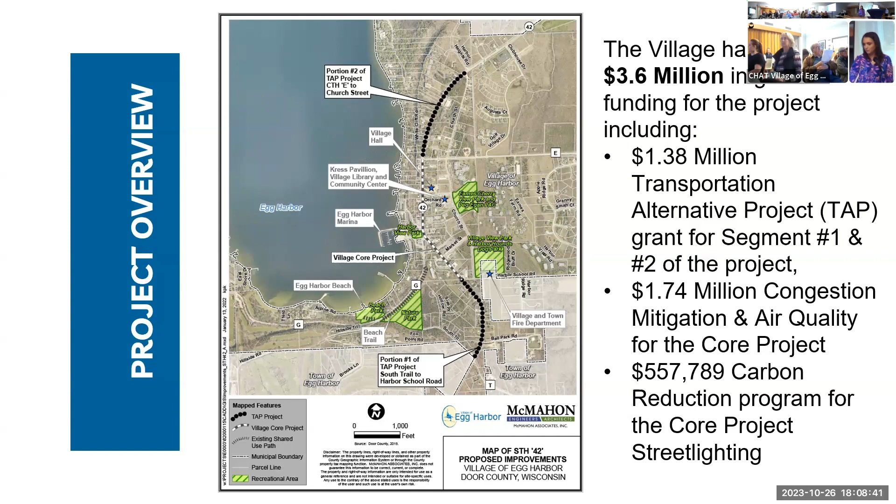A little bit more detail on what each of these project sections entail. First is section 1 of the TAP project section, running from approximately South Trail to Harbor School. This includes urbanizing the highway on the west side to South Trail and east side to Ball Park Road. We'll be constructing a 5-foot concrete sidewalk and a 6-foot green terrace. There'll be on-street bike lanes in this section, street lighting, and some utility replacement and relocation completed by WPS as well. That's not quite underway in this section, but coming up.

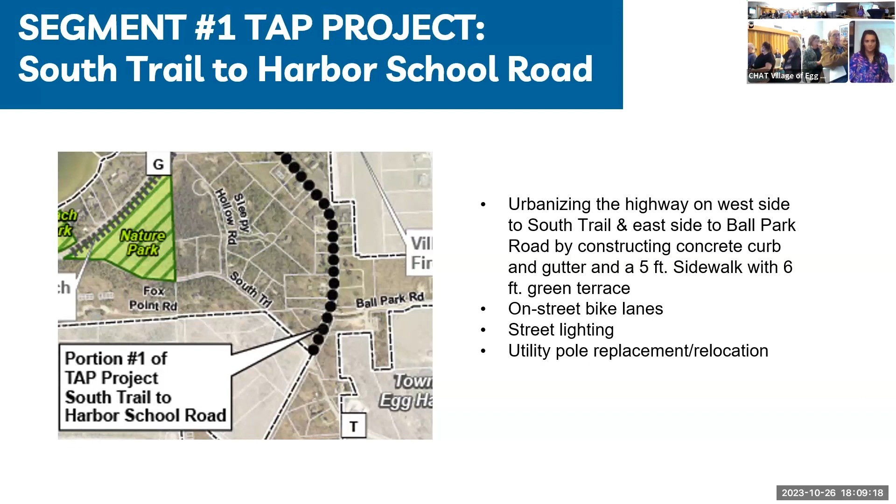Here's a cross section of what that project section will look like at the end of construction. Again, you can see the 5-foot sidewalk and the 6-foot terrace with the bike lanes.

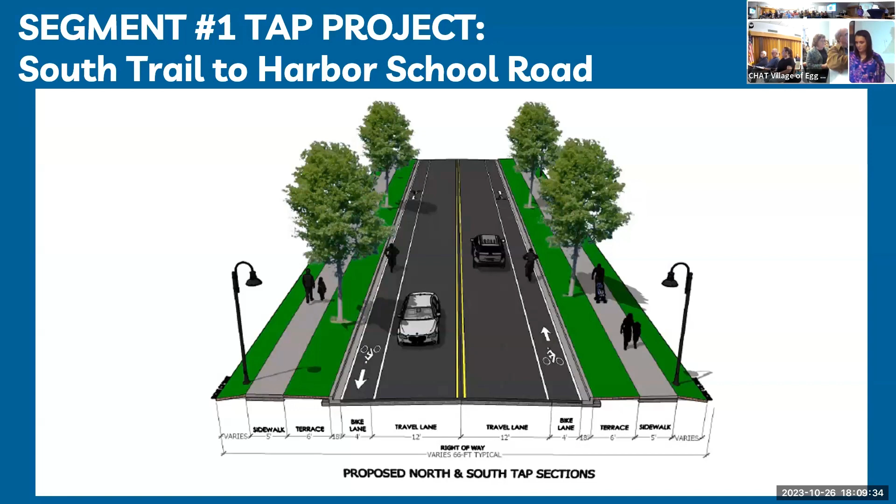Moving north, the next project section is from Harbor School Road to County Highway E. This is what we refer to as the core project section. This includes a 5-foot sidewalk on both sides of the road, a 4.5-foot concrete terrace between the sidewalk and back of curb, with a brick paver accent in the terrace. There's 8-foot parking lanes, bike accommodations throughout this project section. There'll be a dedicated 2-way left turn lane from approximately the County Highway G intersection to approximately the White Cliff Road intersection. This project section includes utility line burial, and also the urbanization of County Highway E on the south side with sidewalk and parking, as well as curb and gutter and bike lanes on both sides of the road. The core project section also includes some modification to our parking lot out at the Bertschinger Center to maximize parking space.

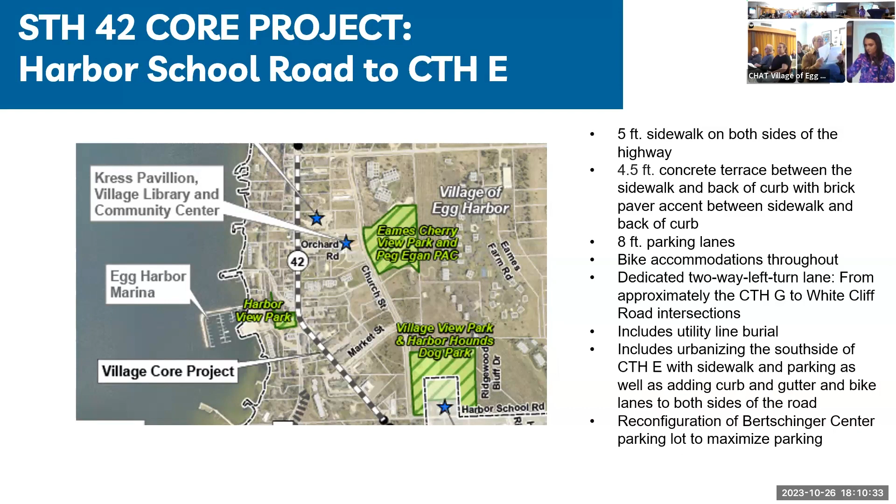This is the cross-section visual of what the core section will look like. Again, you can see the 5-foot sidewalk, 4.5-foot concrete terrace, and the brick paver accents with the parking lanes and travel lanes and bike accommodations.

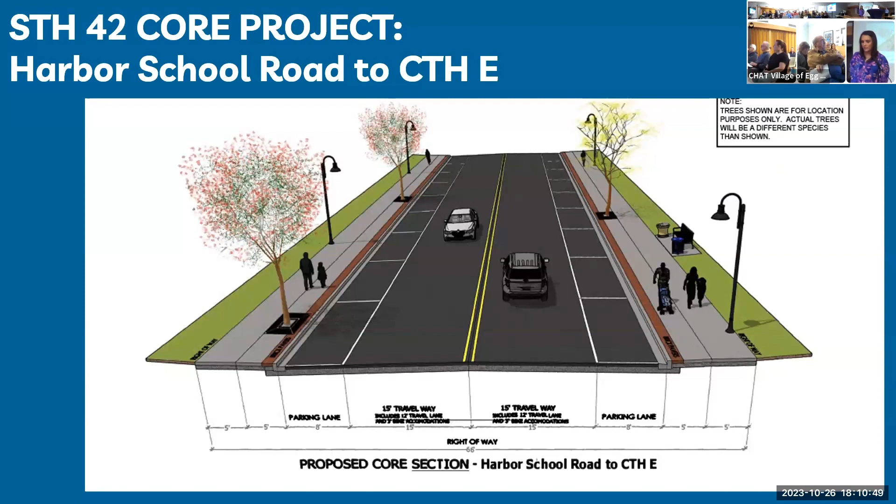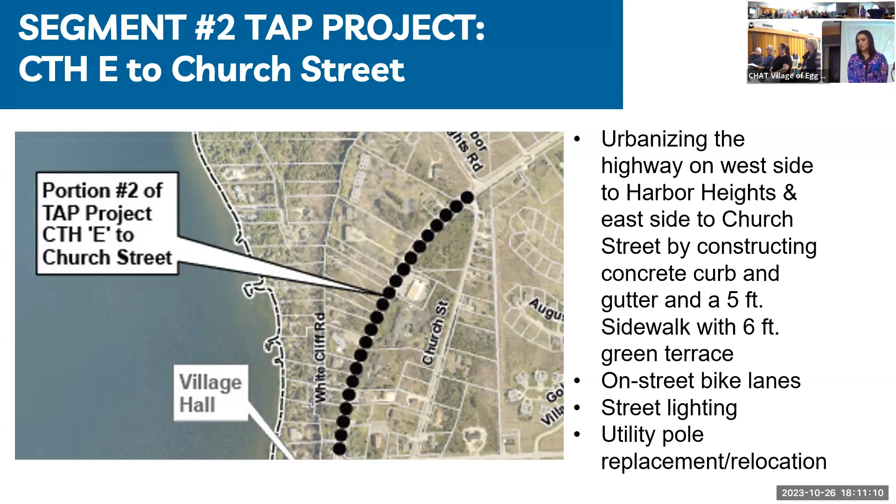Our last project section is the North Tap project section that runs from County Highway E to Church Street. This includes urbanizing the highway on the west side of the road up to Harbor Heights and the east side of the road up to Church Street, by constructing a 5-foot sidewalk and a 6-foot green terrace. It also has bike lanes in this section, street lighting, and again utility replacement or relocation. The same cross section applies for the South Tap section and the North Tap section here.

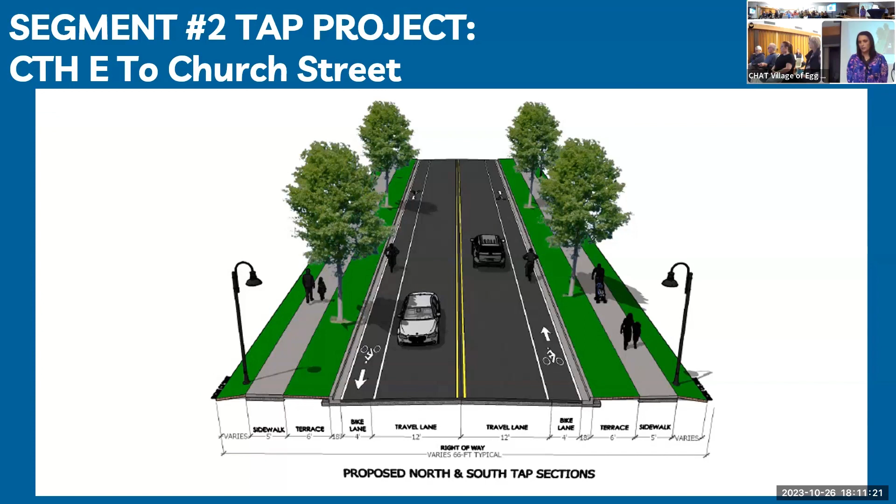Just want to quickly touch on the project purpose and priorities. The overarching goal of this project is to replace and enhance our aging and deteriorating infrastructure. We have some other priorities that are just as important, which include safety, walkability, connectivity, improving parking, and aesthetics.

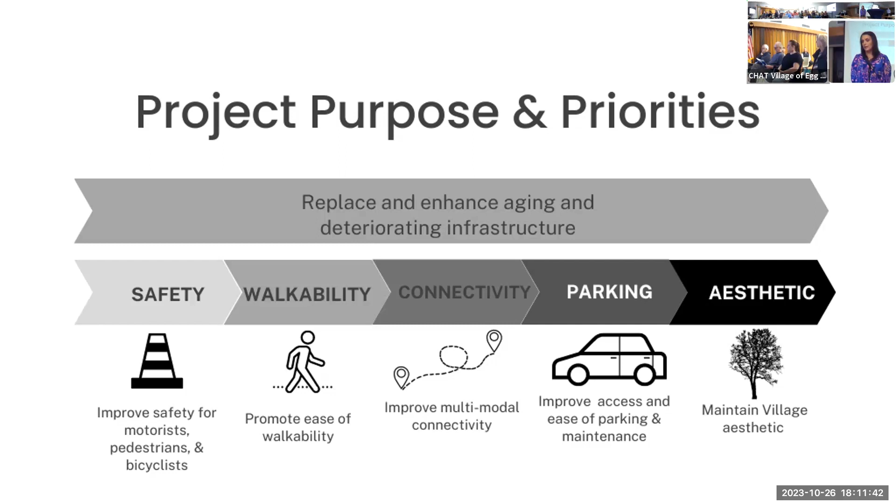Now we're going to turn it over to our WPS partners and Mike Simon to go over specific timelines for the utility piece of the project as well as construction.

Me first. All right, let's see if I can have one plug in. Yeah, here, let me yell there. Let's advance them. Back it in, the forward button. Forward button. Perfect, all right.

Good evening, Ben Rich, project supervisor from WPS for the project. I'm by no means the brains of it, I'm just trying to coordinate everything from our side, the WPS side. So the burial project, as was talked about, I don't have any slides in here about segment 1 and 2 because those are already underway. Segment 1 is the north side of town, right? Yep. The north side of town, that one you probably already noticed as you were driving by, we are already digging holes on that one for relocating some of those poles. There's also one other additional pole that's not part of this, but it's a reject program.

So there's one additional pole outside of the segment 1 project that's getting replaced. Means really nothing to you guys, but there's just one more pole because it was lumped in with our reject pole, which is something totally different.

And then segment 2, some of the tree trimming has already started on that one. So you probably noticed that some of the trees are gone, especially if they were your own trees. Those were cleared already for some of that segment 2 portion, and those holes will be getting dug here very shortly as well.

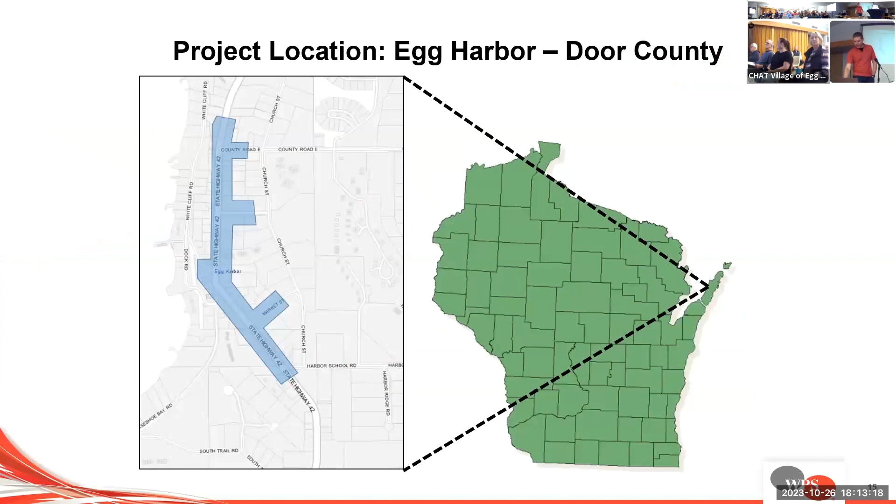So at a high level, what the new underground electric system will consist of is what's called a 4-wire system. We'll have a 3-phase and a single phase going through. It's just going to help improve reliability a little bit if something happens to one versus the other, and also make it a little easier to serve everybody on those 2 different circuits.

With that underground install, approximately 23 pad mount transformers, 9 junctions and 6 poles for that core project area. So this is outside of that segment 1 and 2.

The removal of our overhead, we're removing 41 poles, about 3,500 feet of overhead wire and 24 transformers. So a lot of those wires, that's not only just ours, but also the communications, that's another big part, which I don't think there's anybody here tonight for communications. But those will be coming down as well.

And then the Harbor School Road project. So that's another one. If anybody drove down Harbor School Road lately, you'll see that there's some new poles going up, some new holes in the ground and everything there.

One of the things to also help improve the reliability of the new underground going in. Now, underground, as we all know, is more reliable in storms. But anytime you actually try to fix underground from a utility perspective, that takes longer than fixing anything that's overhead. So in order to help improve switching and reliability, we extended also going down Harbor School Road over to the next road over.

Which I can never remember the name of that road, to the east. What's that? Heritage Lake. Yes, Heritage Lake. Thank you.

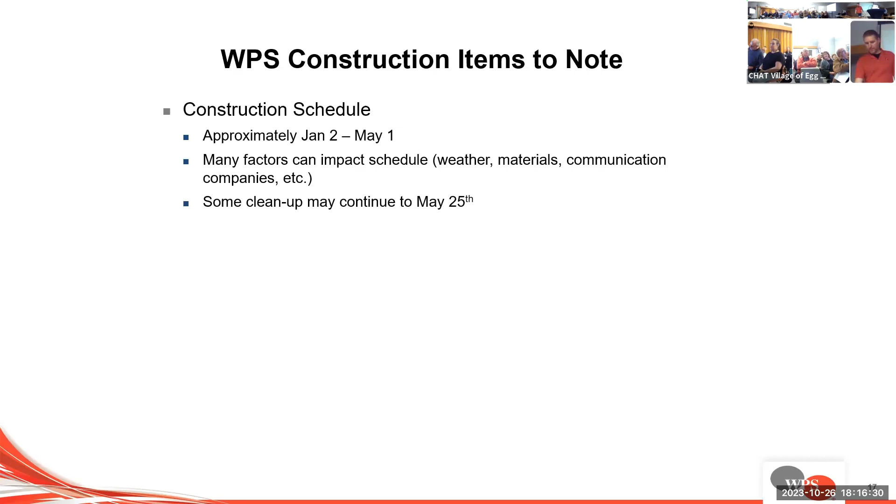A little bit about the construction items. So a lot of our road crossings, which is not too many, maybe a dozen-ish or so, because everybody knows the soil type around here, right? We don't have nice sand or even clay or anything like that, right? It's a lot of rock. So that's a lot of harder construction for any of the digging that we're gonna do.

So a lot of our crossings, and even when we're going parallel with the roads, a lot of it's probably gonna be open cut.

So it's gonna be open trench that whole way for all the conduits we're putting in. We're putting in four conduits for the WPS side, plus some streetlight conduits for the village, plus all the communication conduits, which I don't know the full numbers yet, but there's gonna be a lot of conduits in that trench we gotta open up.

So it is gonna be open cut, open trench. There'll be barricades and fencing up as much as possible, especially if anything's left open overnight so nobody's working. As far as travel lanes, for much of it only one travel lane will probably be available, especially when we're doing any of the crossings. So there will be flaggers to make sure traffic can go back and forth.

As anybody in construction would ask, please use any of the detours as much as possible, even if you're just going over to Church Street or wherever during the construction project. The road will be closed for DOT, but it still will have a lane of travel open as much as possible.

As far as other construction items to note, planned outages - anybody along this that's getting cut over to a new system, there's gonna be at least one planned outage to your residence, business, or whatever it might be, when we cut over from the old to the new. Before even that happens, energizing the new system and some of the switching that might have to occur, there's a possibility of a system-type outage, which would affect a larger area as well.

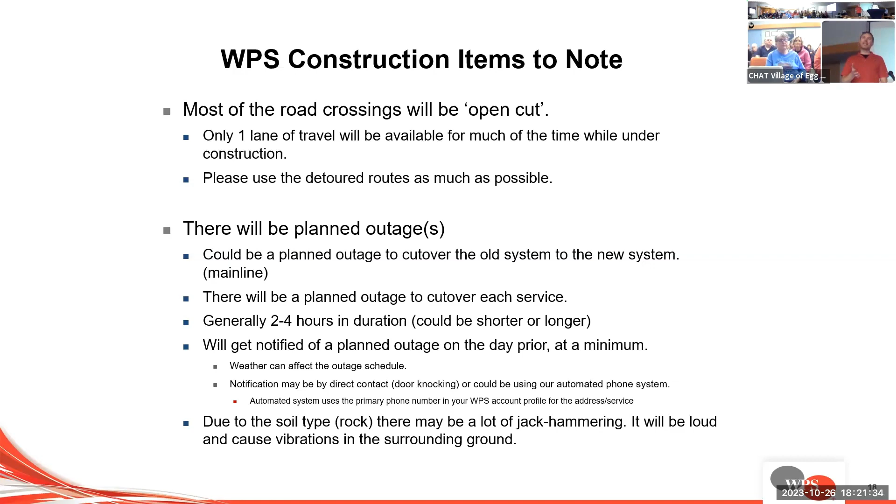The last bullet point is due to the soil type being lots of rock. We're expecting a lot of jackhammering to go on. It's going to be loud, it's going to cause vibrations in the ground and that kind of stuff. So we just wanted to be open and honest from the beginning that it's construction, so there is going to be that going on.

And that's it for the WPS portion at this time.

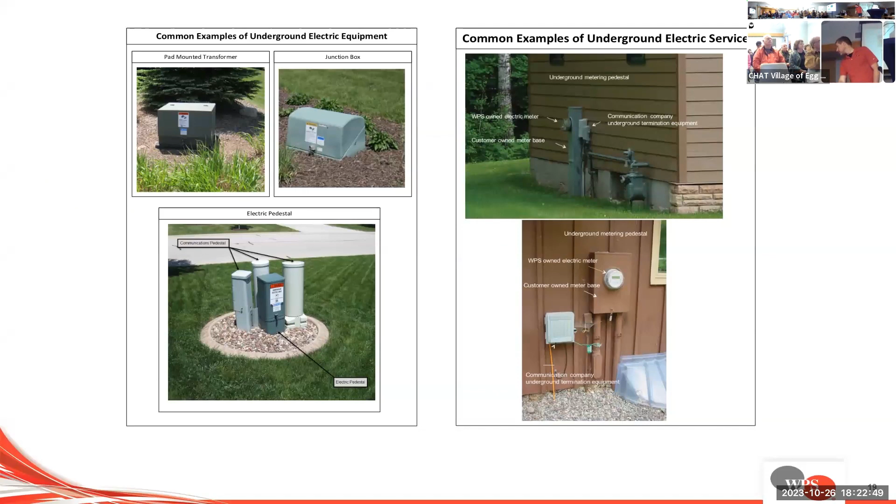Okay, questions at the end? Yes. Careful of the cords. Thank you.

Okay, thank you. Now Mike Simon is going to walk us through the village's construction.

This usually takes a little bit of time. Once the project is let, there's an approval process. We have to go through the DOT, and they have to approve the bids as well, and then we can move on to the construction phase.

For this project, part of the complexity with the funding is that there are actually 3 separate contracts we're letting on this project with 3 separate bids: the TAP, the core, and the lighting for the core.

The village's projects basically start at the edge of the travel lanes and go out towards the right of way. There's a 4th project that the DOT has, where they're going to be milling and resurfacing the 2 travel lanes down the middle. So all those pictures that Megan was showing you is the finished product. But the village's responsibility is from the travel lane out to the right of way, so bike lanes, curb and gutter, parking lanes, sidewalk lighting - that's what the village's project is.

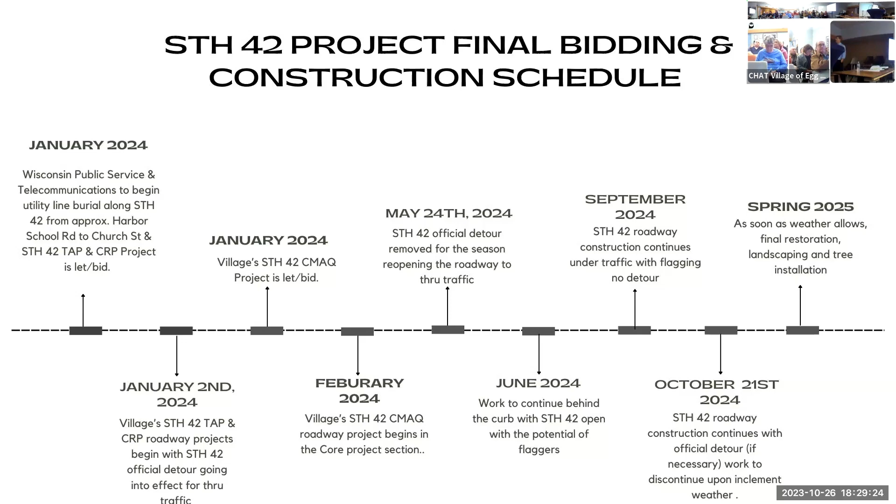Then in the spring of 2025, the remaining work will be cleanup work for the other projects, as well as the beginning of the village's landscaping project. We'll get into that a little bit more in the next slide.

So the work that's occurring to begin with, as I mentioned before, curb and gutter, storm sewer, all the way through the tap in the core, the entire 1.5 miles, has to be done by Memorial Day.

We're going to have the concrete bases and conduit installed for permanent lighting in the spring as well, and the intent is to transfer the existing lighting, whatever they can, onto the new bases, so we have some lighting during the summer months.

With delays in getting materials, lighting is usually something that takes a long lead time, so the chance of them having the new lighting installed by Memorial Day is pretty much zero. The lighting in the tap should be okay for the fall, and we're hoping the lighting will be available for the core in the fall as well. If not, we'll just have to keep the temporary lighting there longer.

So paving the side streets, again, the trenches and the parking lanes. Then in the fall of '24, complete the initial concrete, the permanent sidewalk, the tree grates, installation of the new street lighting whenever that arrives, final pavement marking, and installation of the new traffic control signs.

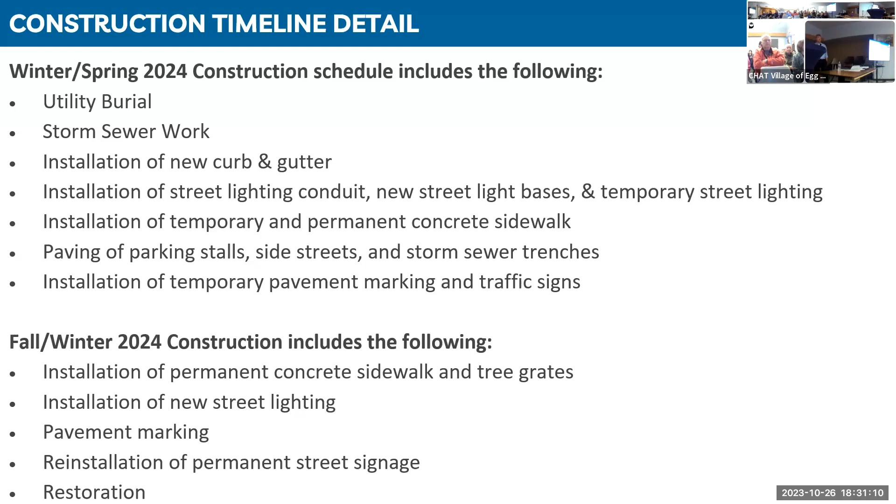And I left out an item in the spring - before we open up the road back to traffic with the detour off, we'll have to get signing and temporary marking back up, probably reinstalling the existing signs and putting in temporary pavement marking.

I'm going to do the bottom here first.

The DOT's project is the milling and resurfacing of Highway 42. It starts south of Egg Harbor, south of the village, and goes all the way up to Fish Creek. So what's going through the village is a very small portion of that project, which is over 7 miles total.

Right now their schedule is spring or fall of 2024, based on how our project is coming along. We've been working very closely with the DOT on this. Their project was originally supposed to be done back in 2019, and they've been delaying that work so the village can get its improvements in. When everything's said and done, it'll be a new asphalt pavement all the way through the village instead of a patch job.

Then in the spring of 2025, completion of restoration, meaning the seeding and stuff, will probably happen late fall of 2024. So I'll have to come back in and make sure everything is growing okay, and basically clean up any work that doesn't get done in the fall. Then the village will have a separate contract for installing new trees and other landscaping through the village.

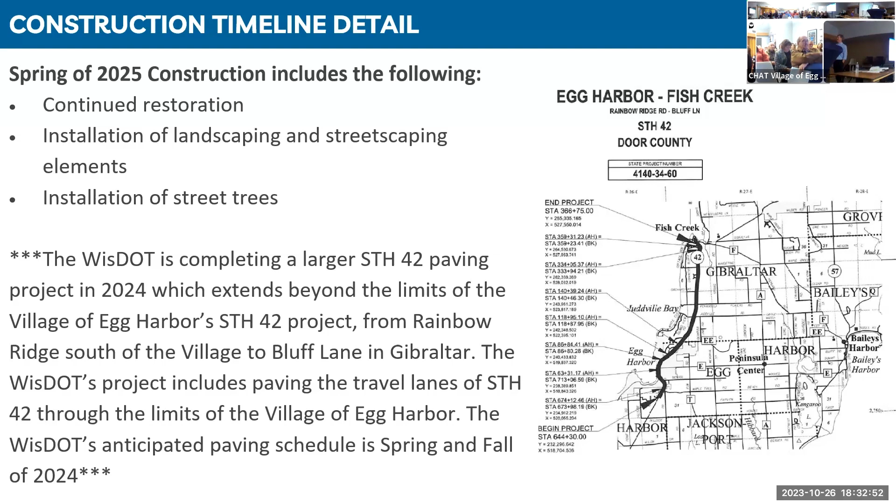Just a word of caution, there's a lot of work happening in a short amount of time, with 4 different road construction projects and the WPS project. A lot of this work is happening in the winter, so pray for a good winter, I guess. Anybody who wants to help move snow out of our way is welcome to do it.

It is mine. Yeah, I can do it. Yeah, sure.

The village has been planning for this project for a while. Reconstructing Church Street was a big component of this project, getting a place for people to park and sidewalk connections down to Highway 42.

During construction on 42, on-street parking along 42 has been pretty much gone, so you'll have to park on the side streets. Other alternatives are taking South Trail or Highway G, where there's parking on G and Dock Road. That's how this project is all set up.

And maybe you can talk about your coordination with the business association. Yeah, I'll get into that later. Sure, yep, we can probably move on.

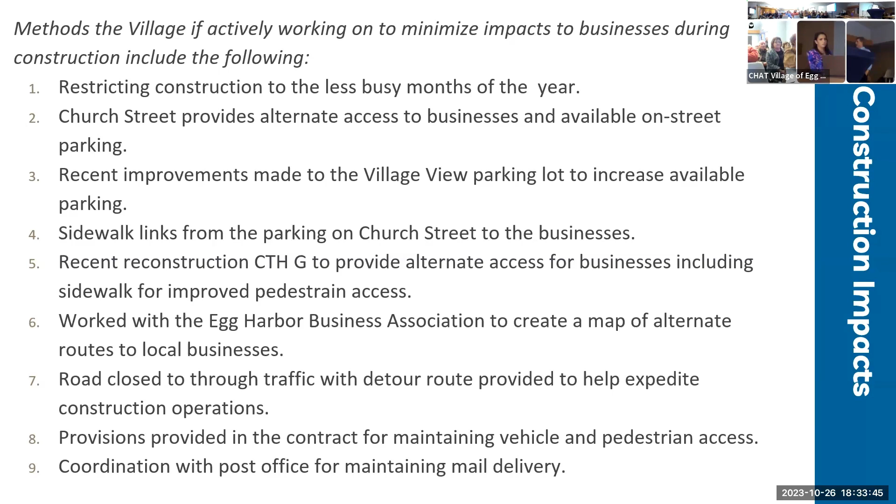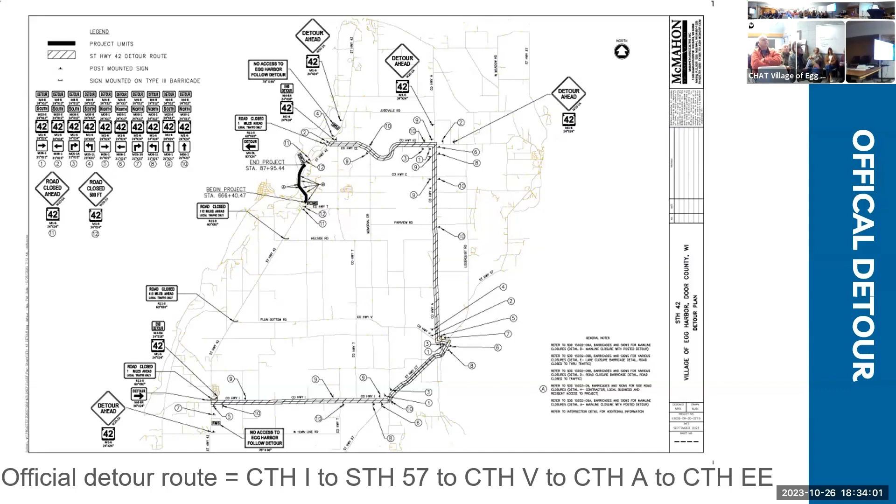This is a detailed map of the detour for the project. It's going to be County Highway I to 57 to V to A, then to double E. Again, that's the detour for Highway 42 through traffic. Highway 42 through the village is open for local access.

I'll get into the special provision in a bit and talk about what local access means. We already went over the timelines for the detours and when they can be in place, and we'll get into signing and all that stuff in a minute too.

As you all saw, the detour is quite a ways out of the village. That's because this is a state highway, and we have to accommodate all types of traffic, whether that's you and me traveling in our cars or trucking traffic, which is subject to weight restrictions. The only roads not subject to weight restrictions are county and state roads, which is why the DOT requires the official detour to be on county and state roads.

But of course, we have a lot of other accessible routes through the village during construction. We worked with the Egg Harbor Business Association to put together the map here. We had some copies in the back. This is a preliminary map put together for tonight, but there will be revisions coming, and that QR code in the corner doesn't exist yet, so if you try to scan it, it's not going to work.

We will have updated copies posted to the website and available for pickup here. We'll also have them at remote locations outside the village, like the Carlsville gas station and other areas for people to pick up. It'll be included in the Egg Harbor Business Association brochure and of course posted online, so there'll be a lot of ways to get access to this map and share it as well.

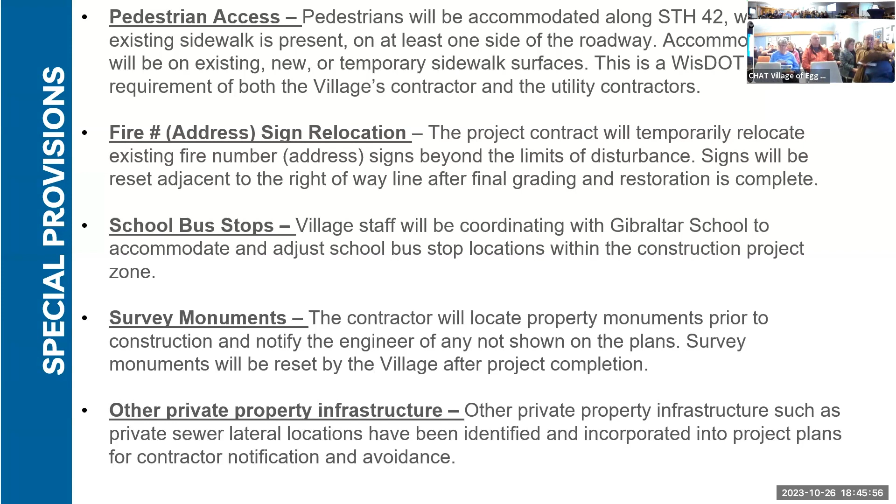Snow removal: the county is going to maintain the travel lanes as they do now, and a private contractor does the parking lanes for the village. The village does the sidewalks themselves as well.

During construction, if you're in an active construction zone, the contractor will be responsible for maintaining access to your driveway. Snowplows aren't going to go through barricades or barrels to plow it out, but the contractor will have to do it, following the village's ordinance: anytime there's more than 2 inches of snow accumulation, within 24 hours after completion of the snow event, they'll have to take care of it.

That's taken care of right now. Garbage collection and recycling collection will be maintained throughout. The contractor will be responsible for working with those collection services to find out where's the logical place for everyone to put their receptacles.

All right, so we shared a lot of information with you tonight. Just want to go over again where you can find this information after tonight, and that we will have a recording of this meeting and the presentation materials available on the village website, specifically on the State Highway 42 page.

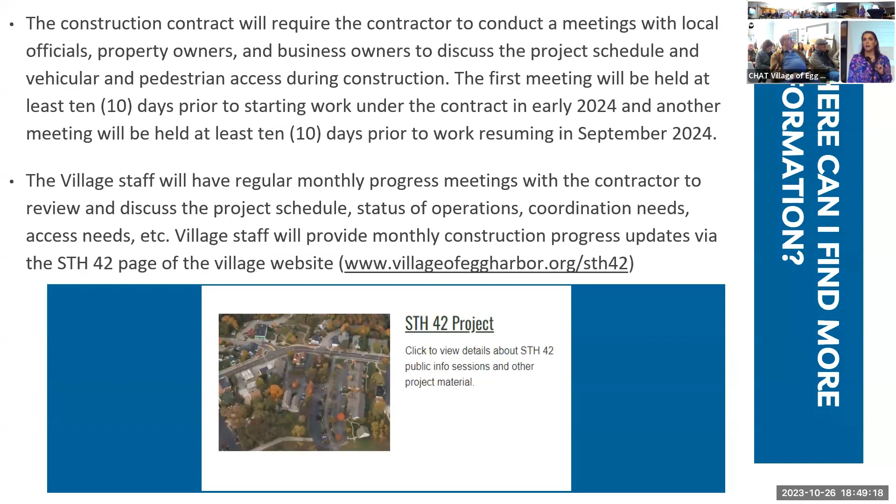What we will do is take the notes from those meetings and do a blog style update on the village webpage, the State Highway 42 page, so everybody has that information and can track how construction progress is going month to month. When you're on the village webpage, scroll all the way to the bottom, there's a number of icons you can click on - this is the State Highway 42 project icon. Just wanted to show you that so it's easy to find information.